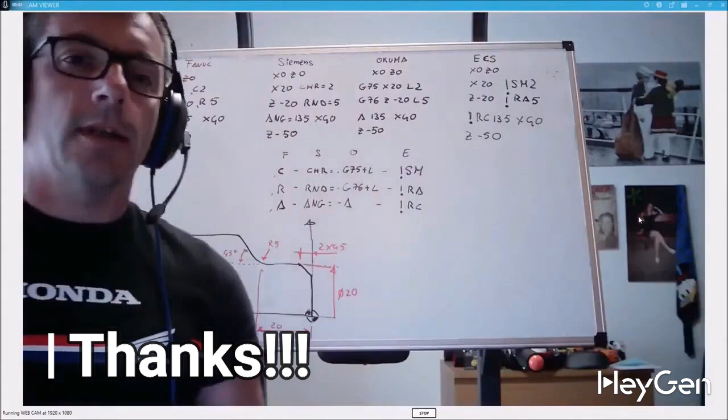We have learned to do direct programming so we can create all the profiles we want. We feel good, we feel capable, and we go to our boss to tell him we can program. Let's say we are working on Fanuc and we have learned it. The boss tells us, program that for me, but that's not a Fanuc, it's a Siemens, or an Okuma, or an ECS. What happens if the control changes? What happens is that something changes. The dialects change, as I already told you.

It's a bit like how the country changes, the way of expressing oneself changes, but the concept remains the same. Adjectives, verbs, the subject, the article are needed. The concept of expression is the same. So today we only see that. We don't learn a concept, but we learn not to be afraid of anything.

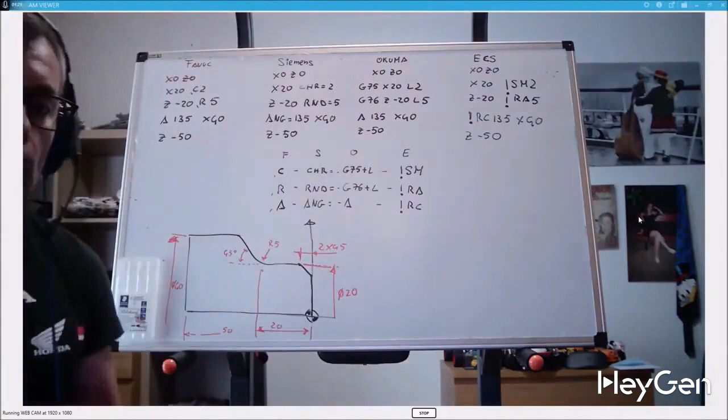We must approach our work in the same way, whether we are working on a control called Pipo or on a control called Topolino. All the examples I have brought you so far were mainly made by leveraging the capabilities of Fanuc. So, a profile like this, x0, z0, always starting from the absolute point 0, programming it this way.

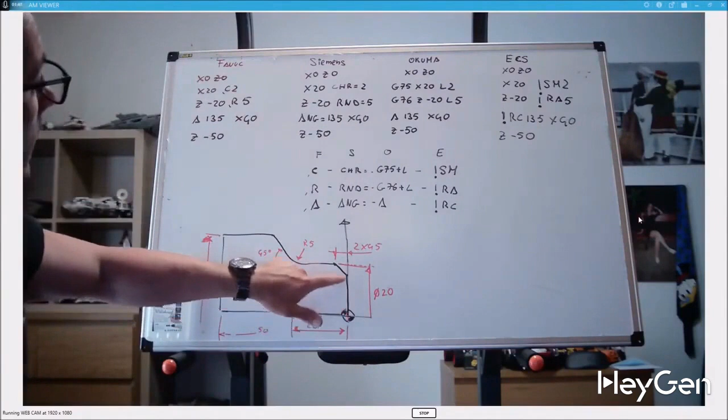X0 Z0, always starting from the absolute point 0. x20, C2 to tackle this chamfer, then go to Z20R5, insert the angle, which is made in this opening direction, so 135, and then go to Z50 because X60 remains the same.

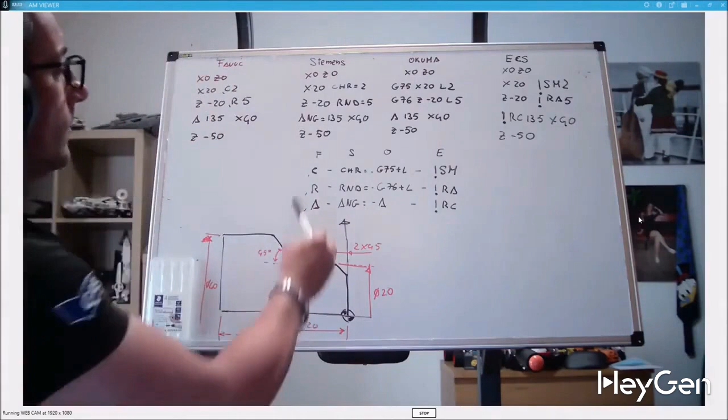If we go to Siemens, look, the concept is, this is the equation. I have done 4 controls that I know, because Heidenhain, for example, Fagor, I don't know them. But if tomorrow a client calls me and says there is a Heidenhain to program, my question is, do you have the programming manual for the Fagor? Do you have the programming manual? Of course, if I have no data, if I have no one to teach me, I must at least ask for the code. But there is a manual in a workshop. So, Fanuc, Siemens, Okuma, ECS, I want to do.

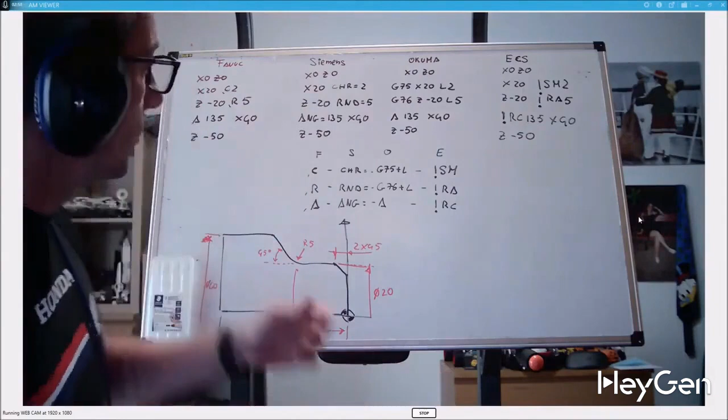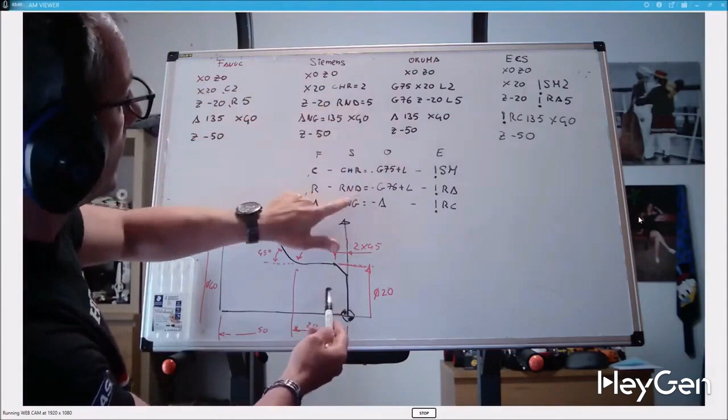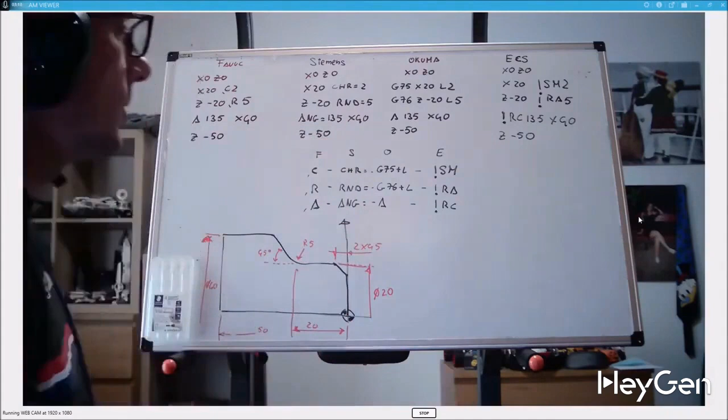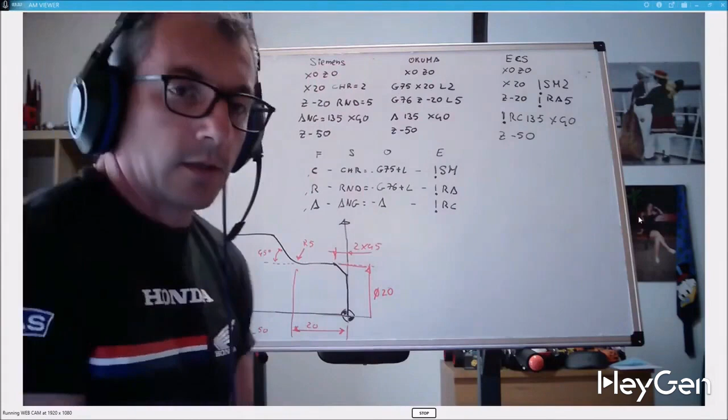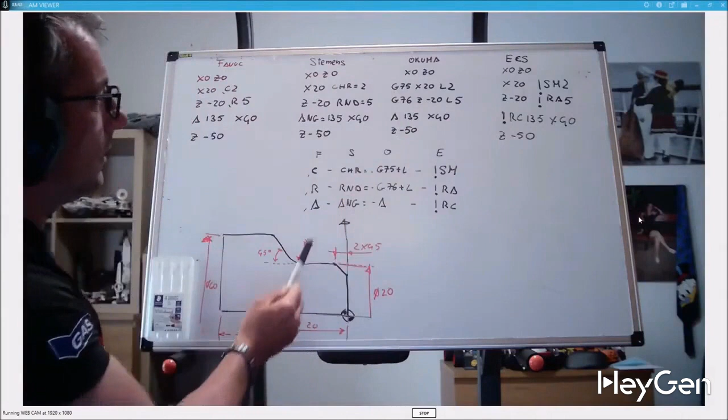Angle 135 X60 angle at Okuma. Okuma wants to be fancy, so it wasn't enough to just put a simple code. It has 2. When I want to define a chamfer, I use fixed G75, assuming I come from G1. Otherwise, I put G1, G75. But a chamfer usually comes from a working movement. So G75 X20 L2, where L defines the chamfer, G76 defines the arc, so G76 Z20 L5 A equals 135 X60 Z50 without putting any comma.

ECS. The ECS is made by us Italians. We Italians are a bit of a pain, we know that, so we put in strange things. Exclamation point SH for the chamfer X0, Z0, X20, exclamation point SH, Z20, RA is the radius. Ra 5 seems like an error because Ra says Ra is the angle and RC is the circumference. No, it is not an error. RC instead defines the angles. So look at how they reason.

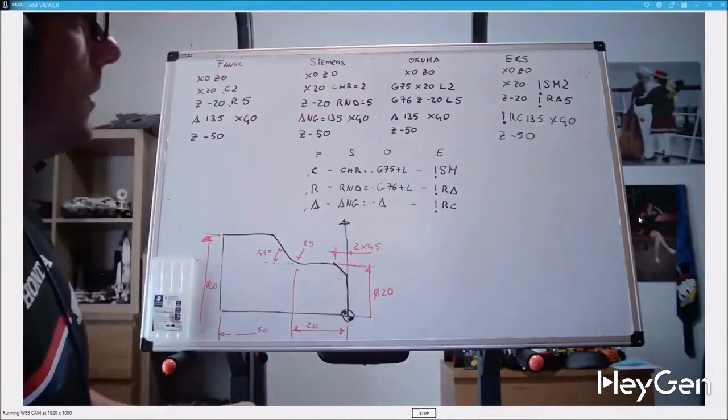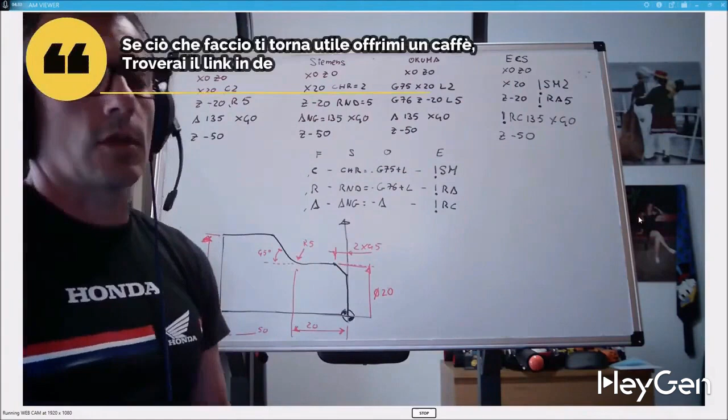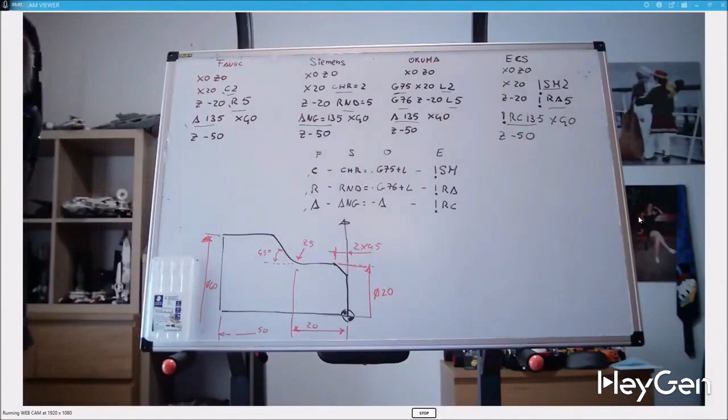They all reason in the same way, using only different ISO dialects. But the concept is more or less the same. They are photocopies of one another, where I modify this, and this, but the block is always the second. Ideally, here, I modify the R, which becomes RND, which becomes G76 L5, which becomes RA. I modify the A, which becomes ANG, which coincidentally returns to where there will be a small comma that becomes RC135. So nothing too scary. I would say that you simply need, as I already told you, not to memorize, but to understand the concept.

Go to the owner and ask him, since you program on Okuma, to give you something like a simplified guide, the one they give you when they sell you the machine. This one is from 20 years ago, from '99, but the machine is still the same, as long as it refers to that machine. Of course, if they give you a FANUC manual from '87 to work on a machine built in 2017, something won't look right, so we need to clarify that.

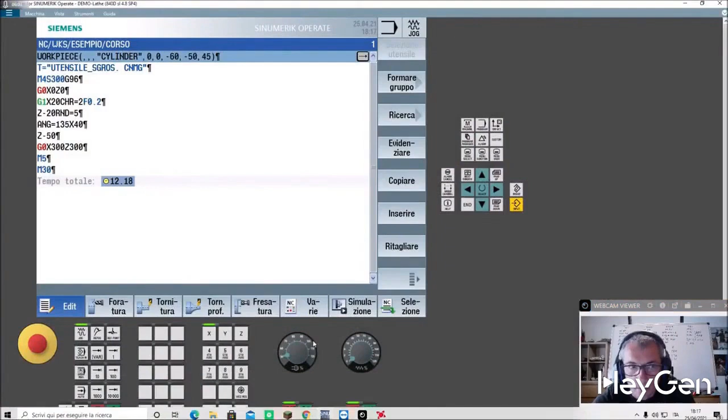I apologize for what you'll see on screen, but let's try to work with it. Let's put my ugly face here and take a look at the simulator. As you can see, I entered G0, X0, Z0, G1, X20, CHR here in the simulator, and if I run the simulation, the machine simulates exactly this profile.

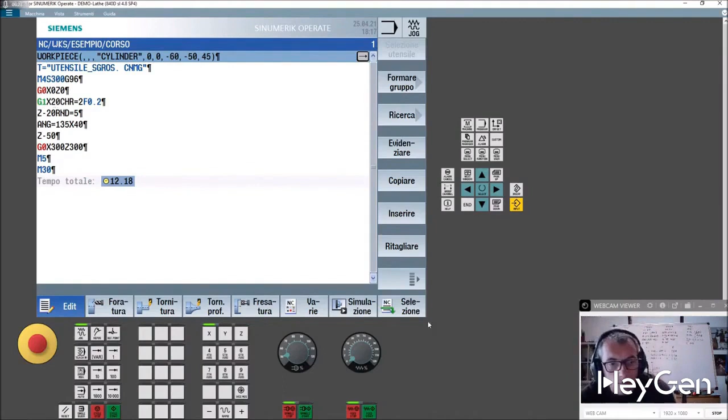Now let's see, we have it here, there it is. This is the first one. So first we have the definition of the raw piece. Don't pay attention to these details now, we are talking about programming, not focusing on a specific CNC, so we're concerned with programming logic. Let's define the raw piece as we did in the simulator. Maybe I'll show it to you again later.

We call the turret and set the spindle rotation parameters, and from here is our work. So G1, X20, C2. Here I need to set a feed rate, because otherwise the simulator gives me an alarm, while the whiteboard doesn't return alarms and is less of a hassle.

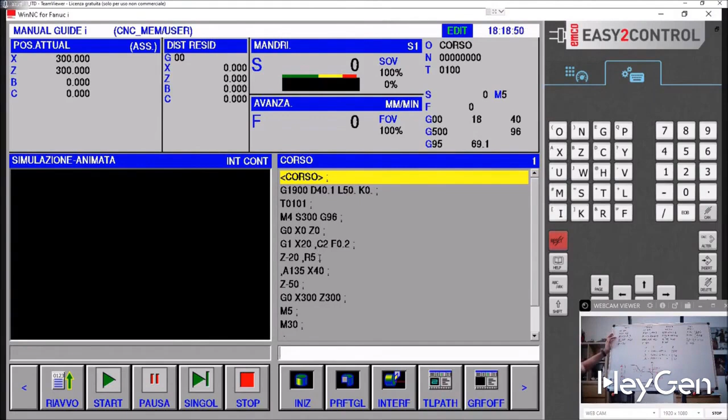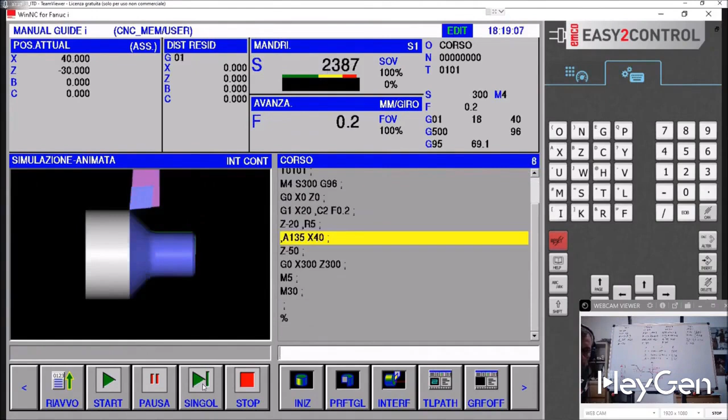A135 X40, Z at 50, I'm going to simulate it, and you can see that we do it in single block. The tool arrives, rests, rises, creates the chamfer, makes the angle, 135/40, Z50.

Same discussion, program check, we do it in single block. We can do it here as well.

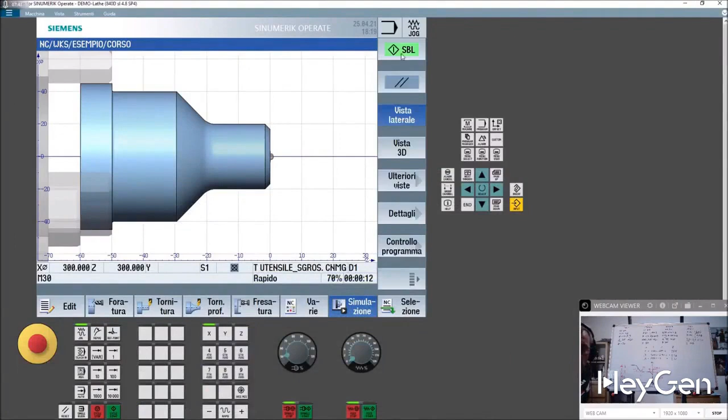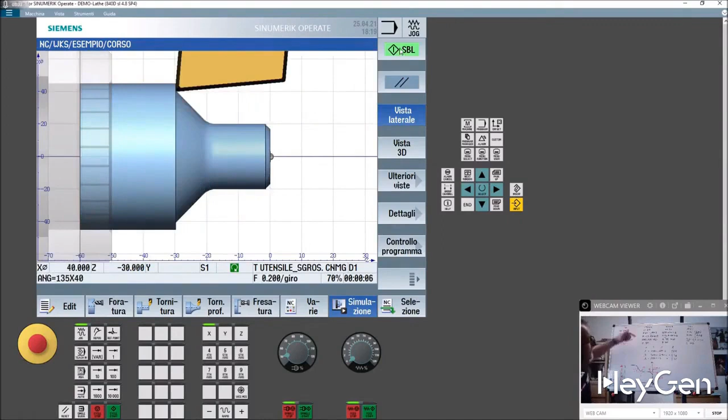You see, I think this simulator is much clearer, but we can't read the program next to it. Obviously, that's the price to pay for having such a large video. You see, the chamfer, the angle, the 45 degrees. We are here, and also here.

If I go back to edit, I still had to define the dimensions of my raw piece, this is just a graphic matter. Once I called it... I apologize for the term, I didn't mean to be rude, I'm just a bit of a rough mechanical technician, so all this nonsense, however, it helps a lot, so I didn't mean to discriminate against anyone.

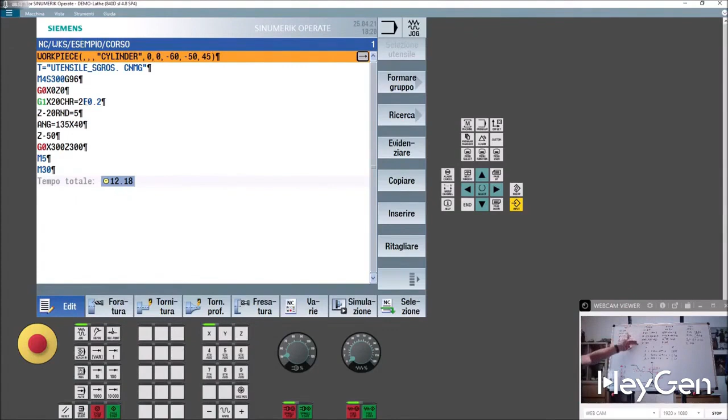The roughing tool is CNMG, so I called a tool, input the machine data, and then did exactly what I did on the FANUC, also inserting an F here, because a spindle that rotates needs an F in millimeters per revolution, and I included it in this code. So changing programs, changing CNC, is not a problem. Just 2 codes and away you go. The logic is always the same, as you'll see later.

Now, I won't be able to demonstrate it with the simulator, because the numeric simulator was designed to be used like a CAD CAM, so it doesn't have macros. However, in macros, the concept is always the same. In fact, macros are already more standardized.

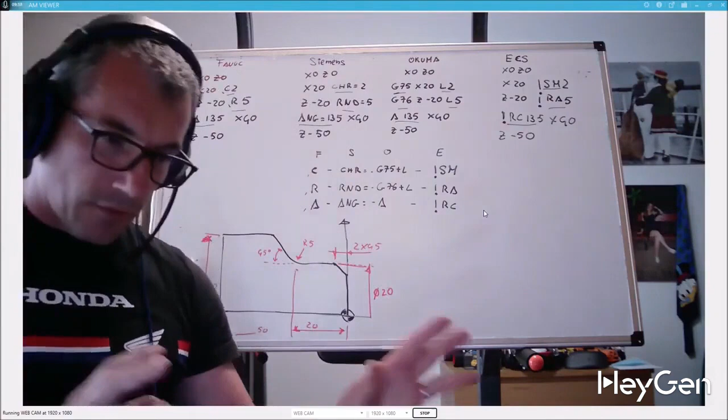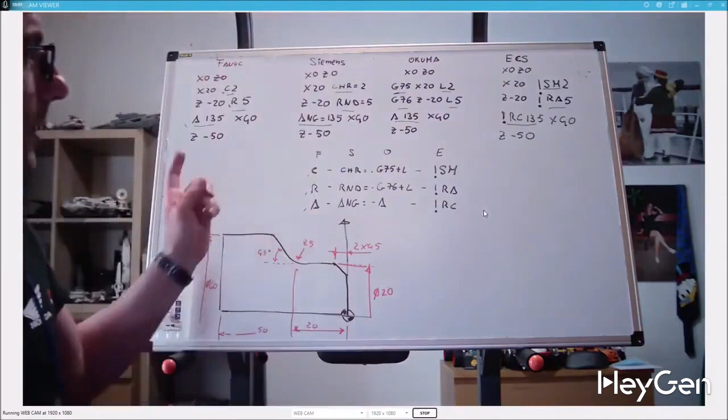Today, I haven't taught you anything, except a methodology for approaching work in machine shops. I hope, however, that I have reassured you by showing that in the end, one CNC is worth another, and that I have been helpful to you once again.